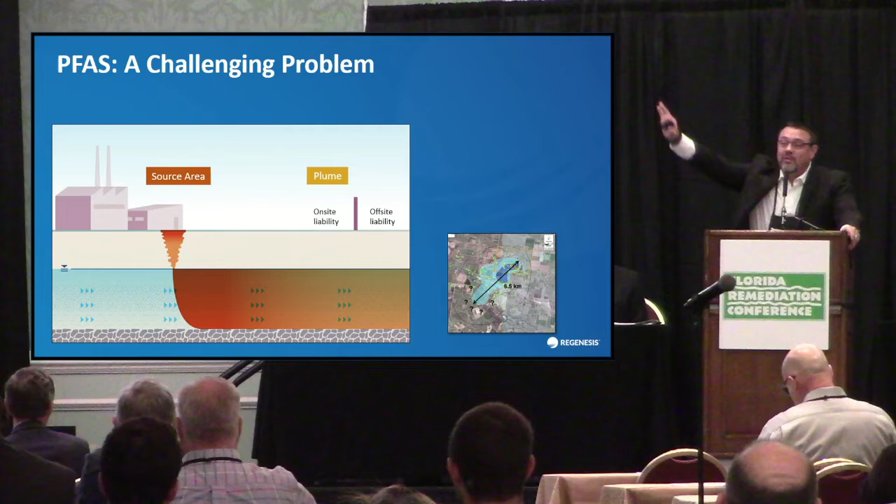First, before we talk about the solution, let's talk about the problem. As we're getting out there and starting to delineate these plumes, we're seeing where they're actually at, and we're finding out they're pretty big. A lot of the attenuation or degradation mechanisms that usually keep these things in check are not there, so they're ranging free across the remedial landscape. In that process, they're crossing lots of sensitive receptors: bodies of water, municipal wells, potable water wells, crossing boundaries. They're all over the place. So we've got on-site liabilities, off-site liabilities. We've got quite a problem on our hands, right below our feet.

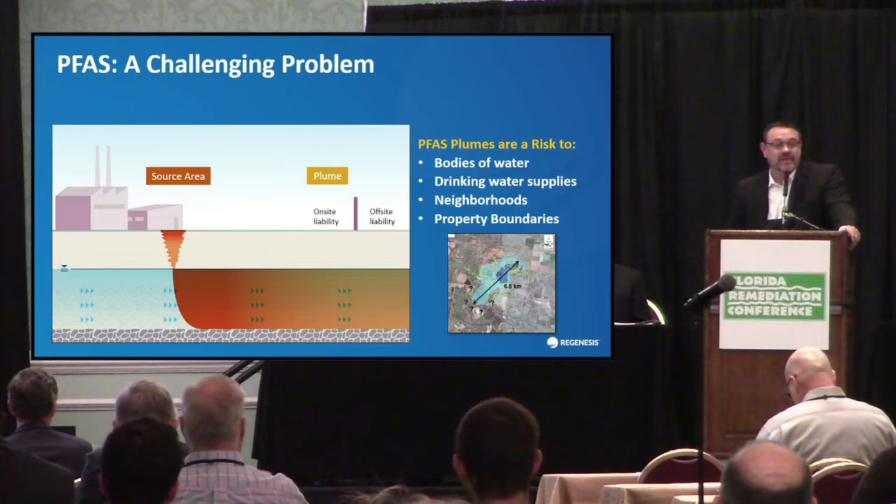So one of the approaches in the in situ world over the last several years is using colloidal activated carbon as a permeable reactive barrier, or PRB, to mitigate and slow down and retard these migrating plumes. Essentially this is an attenuation mechanism. If you look at the ITRC definition, they call it enhanced attenuation: the result of applying an enhancement that sustainably manipulates a natural attenuation process, leading to an increased reduction in mass flux of contaminants. So we're going to dig into what that means, into that mass flux question, and how this helps provide a mechanism for treatment.

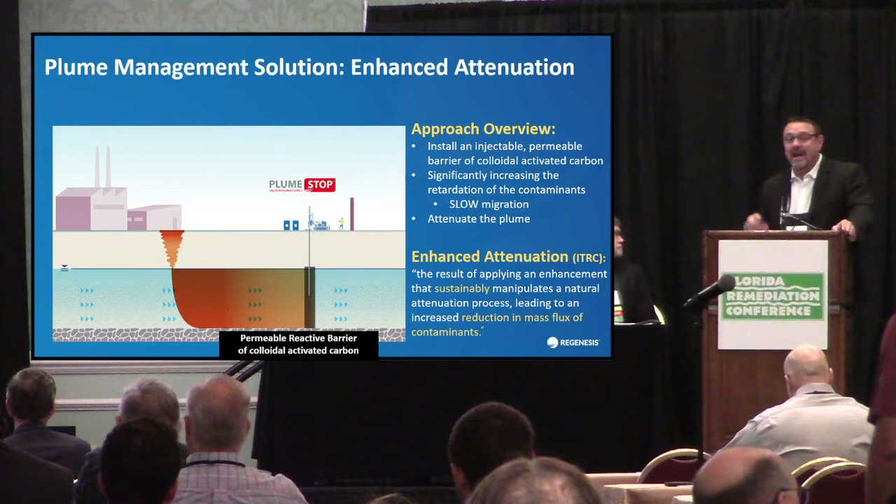In any scenario where you're using a permeable reactive barrier, whether it's carbon or otherwise, there's a lot of advantages. One, there's no infrastructure, no O&M — it's a passive management strategy versus an active one. It's not generating waste, and in the case of carbon, we're able to treat down to low part per trillion range levels. There's even rumors and rumblings of parts per quadrillion — that's a little mind-blowing, we'll see if the labs can keep up. But for now, we know we can get down to these PPT levels with carbon, and all of this translates to a very cost-effective approach for treatment.

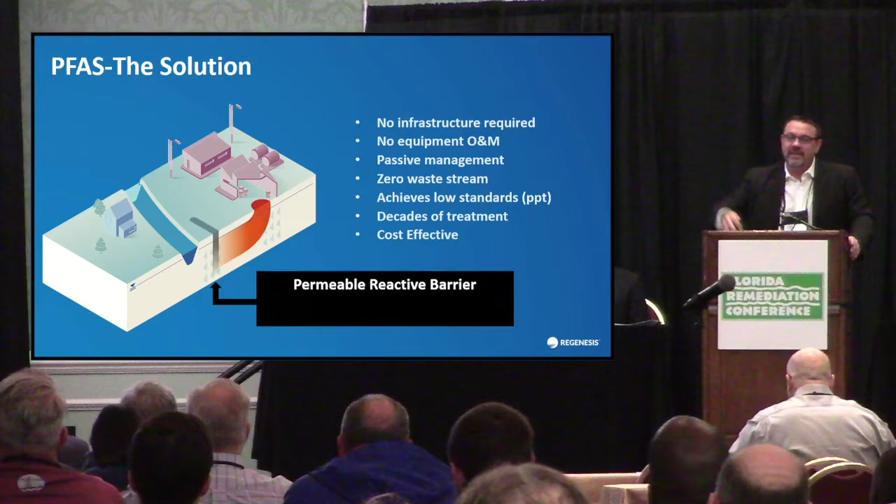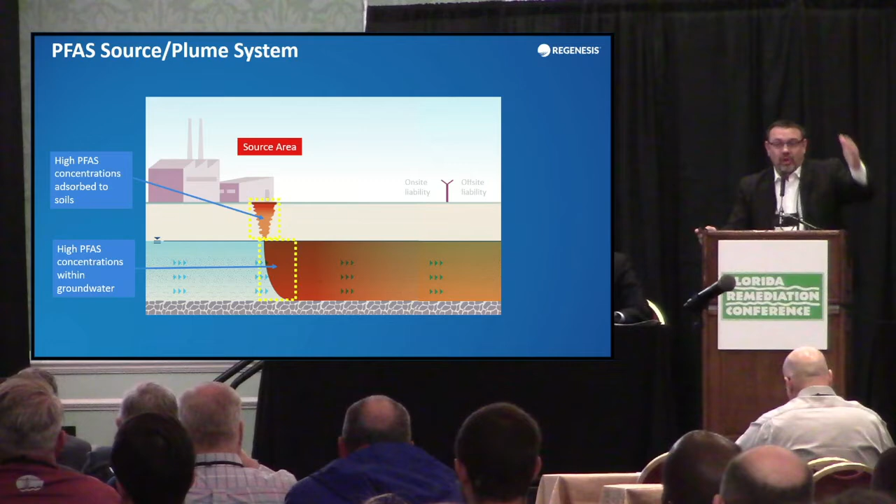So what we end up seeing is a few major areas where we identify different types of impacts. We've got high PFAS mass in the vadose zone, often a very thin zone, maybe from AFFF, a fire that was put out, or fire training for example. Below that, we see the capillary fringe where this stuff's hanging out. And then the distal, or further edge of these plumes, where we have lower concentrations down gradient. Each one of these looks a little different.

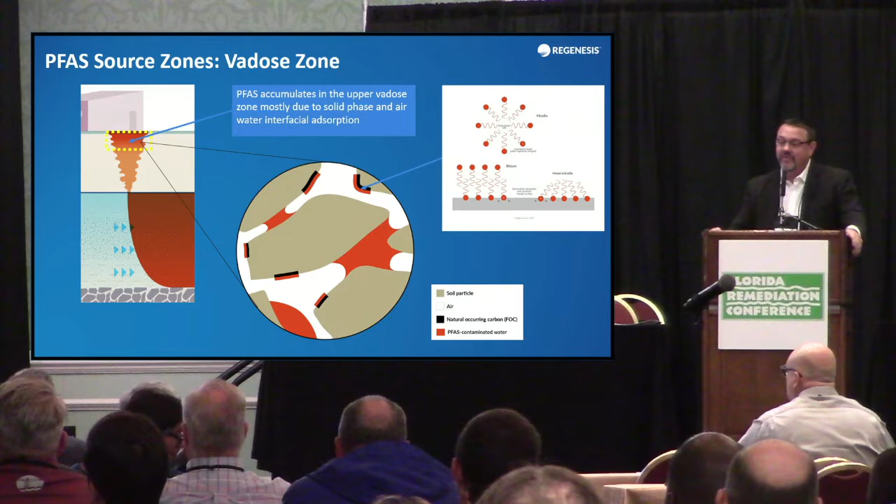If we look at the vadose zone, what we have is mass that's basically due to solid phase and air-water interfacial adsorption. They end up forming different structures, these micelles — hydrophobic and hydrophilic structures, hemimicelles, bilayers — all these things start to form in the vadose zone. When we go a little deeper, into the capillary fringe, it takes on a different feel. You have this same air-water interfacial adsorption going on, but the hydrophilic head sticks down into the water and the hydrophobic tail sticks up.

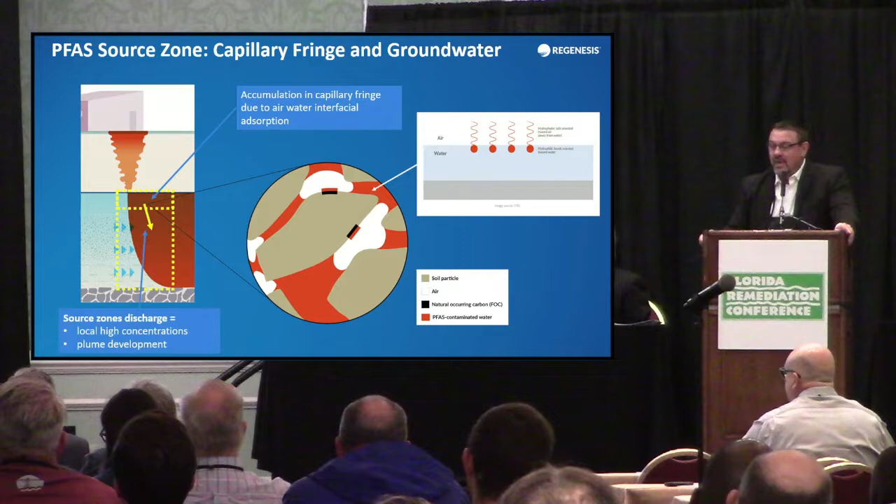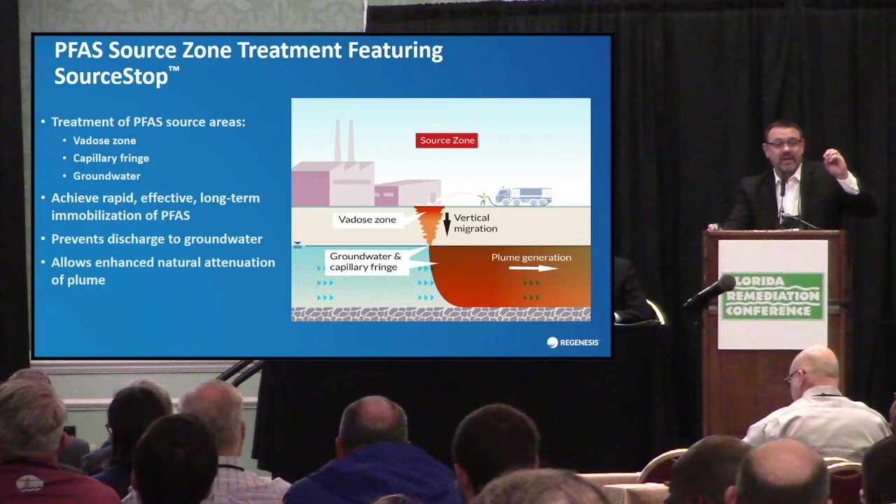So a little bit different look to the structure of that. And then, of course, down gradient, we have the dissolved phase mass that we're dealing with. So each one of these we want to approach, the vadose zone, the capillary fringe, the down gradient portions of these, to essentially get very rapid reduction in the leachability, the mobility, and the migration of these plumes.

And try to stop them, both at the source and down gradient. Essentially, if we're able to go to the source, kind of cut off the head, as we often do, and then go down gradient and stop further migration with these barriers, I'd dare say, we could have a forever solution. But let's talk about that before I get ahead of myself.

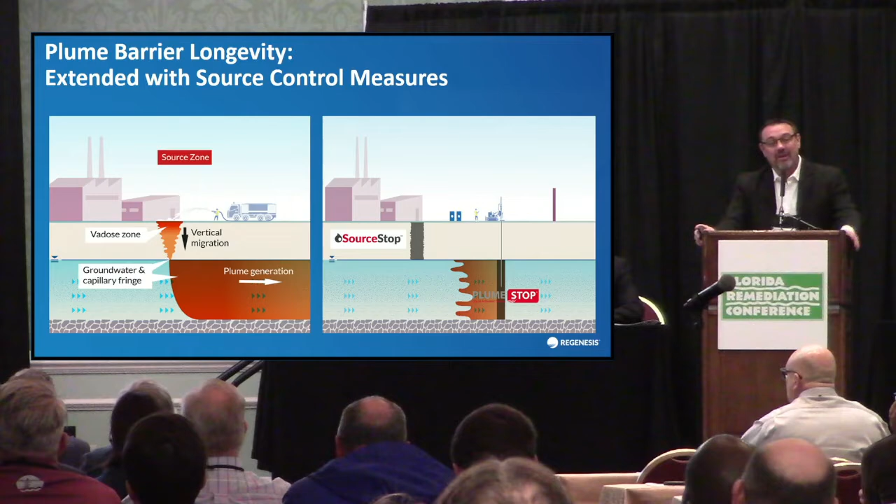All right, so that's the background of what we're dealing with, where it's at, what it looks like in the subsurface. So what we have is a lot of common questions I've seen, kind of 3 categories of those, and I really want to address those today as part of this discussion.

So the first one is, without contaminant destruction or degradation, how does this classify as remediation? How does it fit as remediation? The second is, how do we know about longevity? How do we know how long this is going to last? What affects the longevity and impacts that? And then finally, how can we really make sure we're getting a good barrier or source area treatment and getting carbon where we need to get it? So these are kind of the 3 major areas I've seen come up as we've encountered questions about this approach.

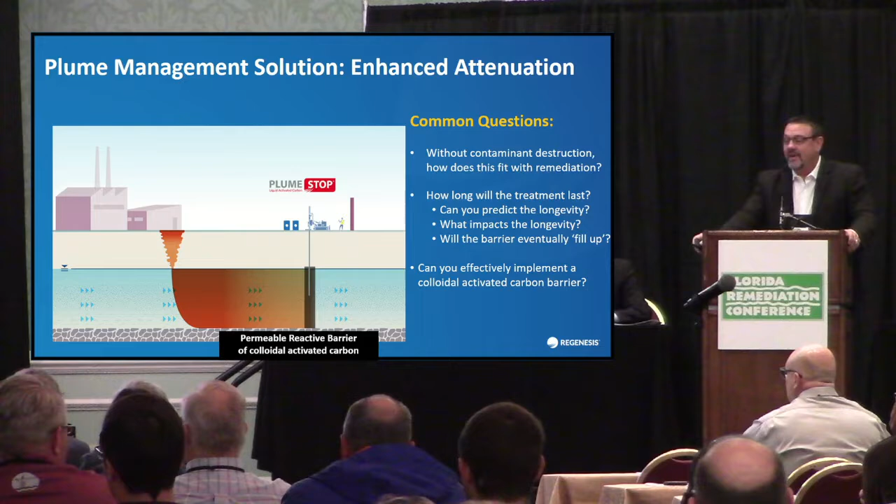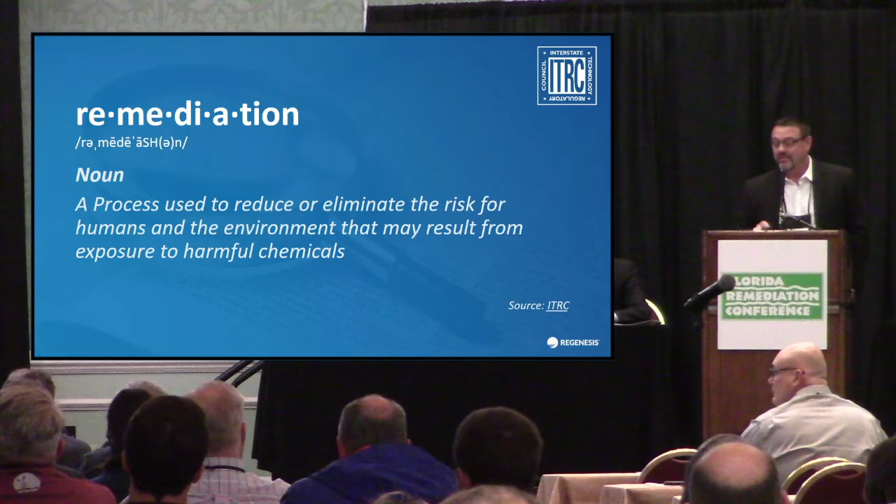So let's try to knock these out. First of all, it's the Florida Remediation Conference, right? So what is remediation? I think sometimes we forget, but ITRC, again, our friends say it's a process used to reduce or eliminate the risk for humans and the environment that may result from exposure to harmful chemicals. So reduce or eliminate risk and exposure.

And we know that risk is a product of the hazard times exposure. Now, one of the mechanisms we've been using for a long time to deal with this is attenuation, natural attenuation. And EPA defines that in 3 different ways. One is transformation of the contaminants to a less toxic form. So that might be like enhanced reductive dechlorination, ERD, where we take PCE, reduce it to ethene, innocuous ethene.

That's not what we're talking about here. Reduction in contaminant concentration—maybe we use chemical oxidation, we destroyed these compounds. Also not what we're talking about here. But the third one is reduction in contaminant mobility and bioavailability. So we're talking about that one.

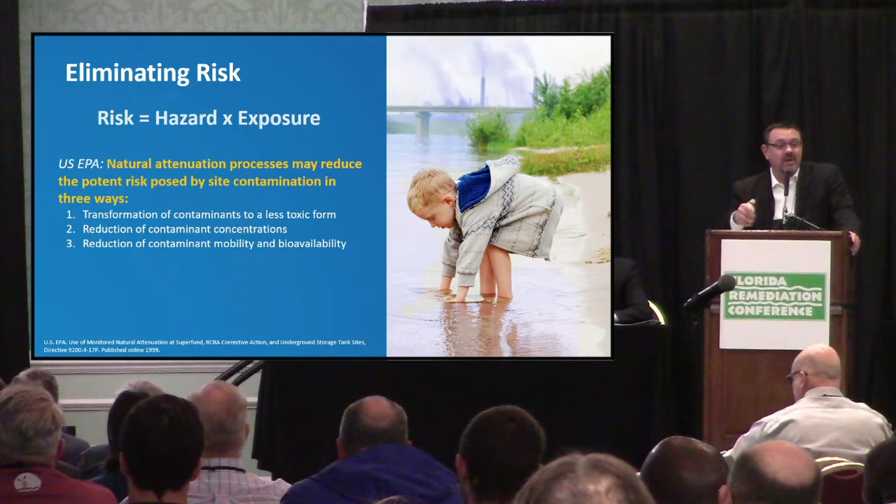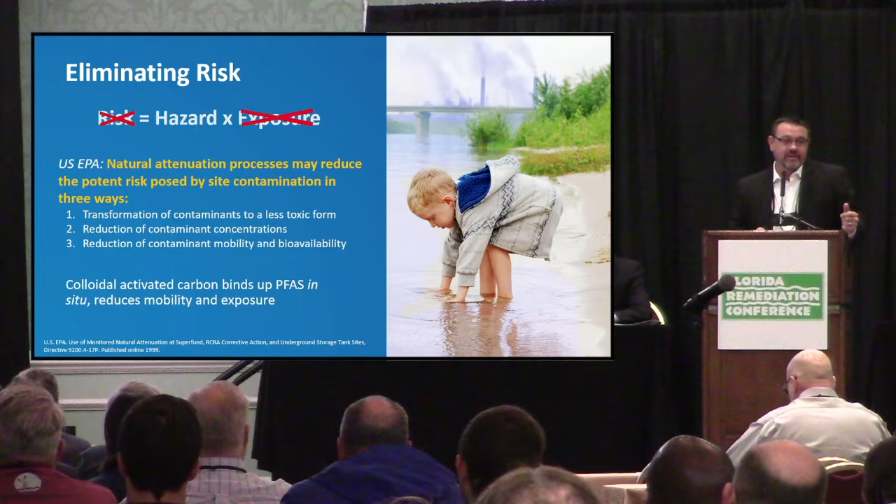So reduction in contaminant mobility. And basically by binding up the PFAS in this matrix of carbon, we're able to eliminate the exposure and therefore we eliminate risk. We've been doing this for quite some time for other compounds. We've been doing it for recalcitrant type organics. We do it for metals where we're not actually destroying them, but transforming them.

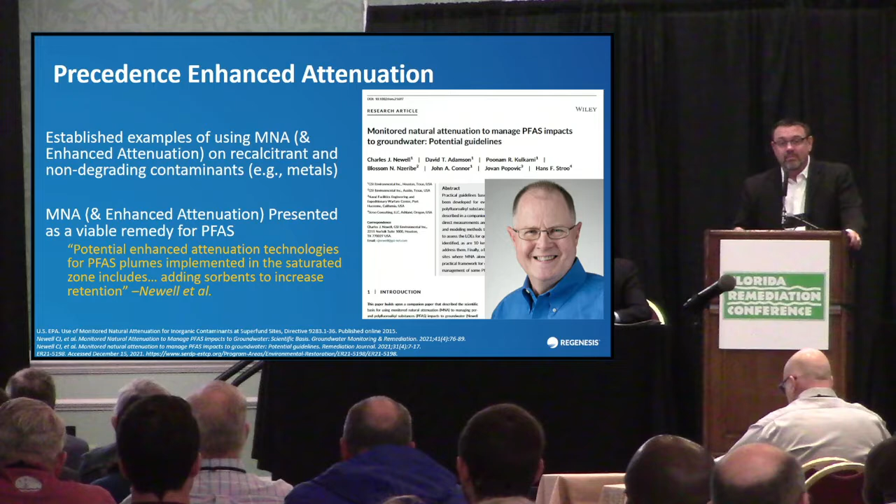So he recently said that the potential enhanced attenuation technologies for PFAS plumes implemented in the saturated zone includes adding sorbents to increase retention. So there's different types of sorbents—activated carbon, colloidal activated carbon is one example of those. So this is a path that is being promoted by folks that are in our industry that have been in it for a long time. So it's nothing new, but it's new because we're talking about PFAS and how we treat it.

So just to make sure we're on the same page about when I say colloidal activated carbon, what am I talking about? There are a couple different forms, a couple different technologies, but essentially it's 1 to 2 micron scale carbon. To put that in perspective, that's about the size of a red blood cell, the size of bacteria—we're pretty small. So it's not powdered activated carbon or granular activated carbon. This is really small stuff in a suspended colloidal liquid form.

And what that allows us to do is get high volume, wide area distribution and inject at low pressures. And so we can get this stuff spread out in a way that we basically convert the subsurface into a carbon filter, kind of like a Brita filter in the subsurface.

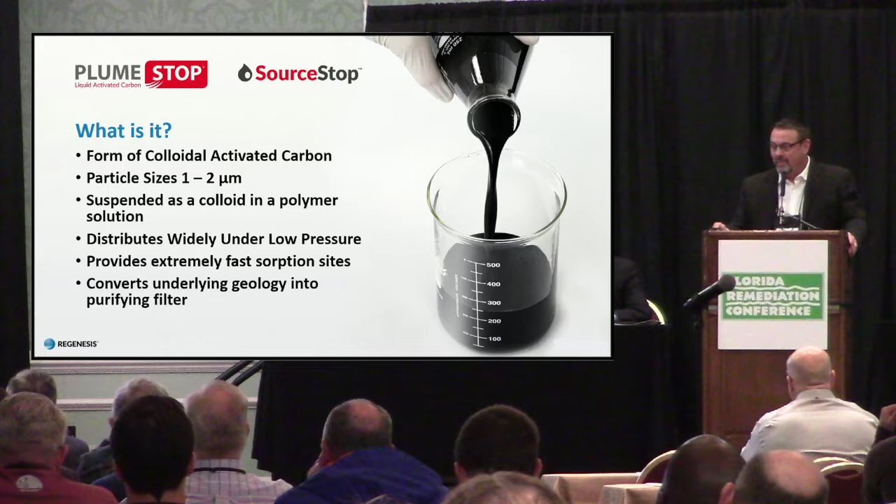So I always go back to these pictures. I've never gotten tired of them. It's been 7 years this week, actually, that I've been using these photos.

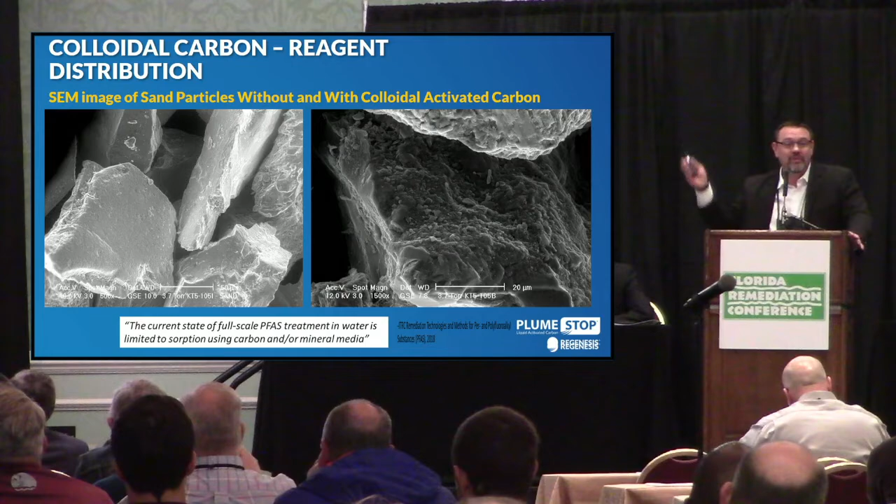But the pre- and post-injection scanning electron microscope images tell the picture. Essentially, we are painting, I like to say, the surface of the aquifer matrix with this carbon. That becomes a permanent part of the aquifer matrix. So, again, conversion to a carbon filter without changing the advective transport or the hydraulics of that zone. It's not blocking up the pore throat diameters, still wide open for contaminant transport and then sorption.

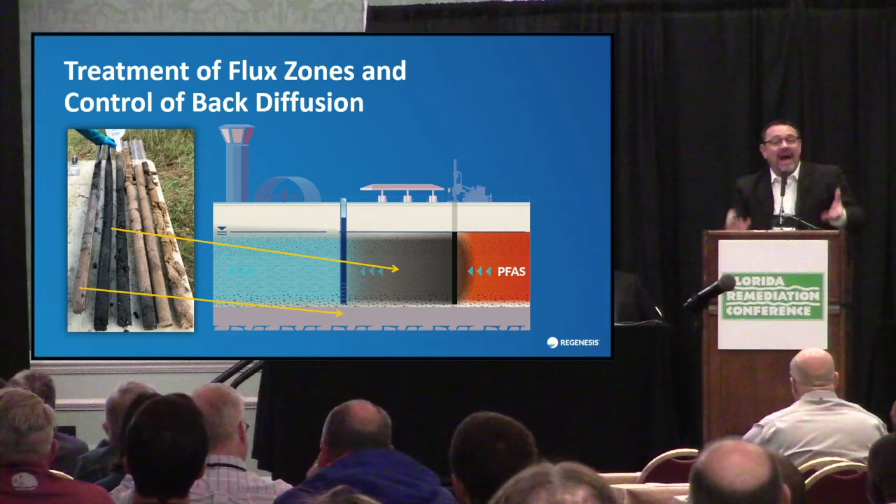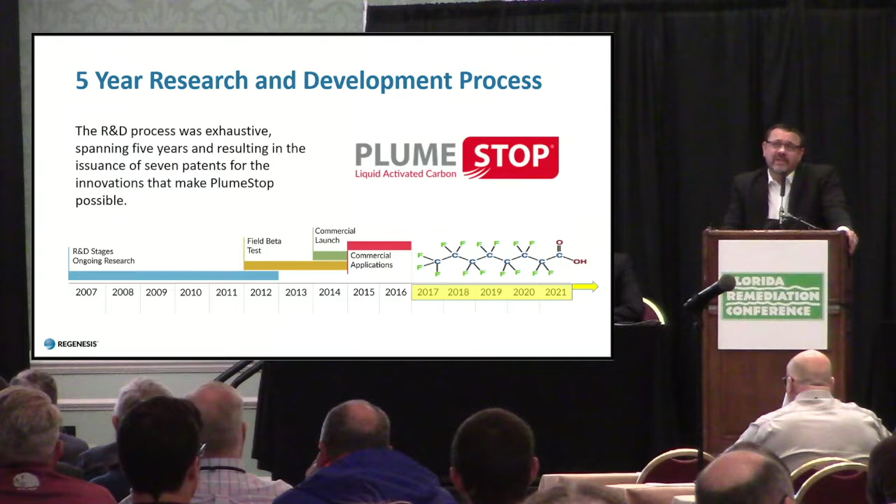So I wouldn't say colloidal carbon's a new technology by any means. It's been a decade plus in maturity, but the use of it in the PFAS world has been going on for about the last 6 years for treatment. And I've seen, I think, over 26 sites now globally that we've treated with this approach.

And there's a lot of folks out there, third-party research that's going on with academia. You guys might have heard Dr. Paul Hatzinger with APTIM. I know there's a lot of APTIM folks here today. He's one also doing some third-party research, EPA-funded work. So a lot of folks exploring these concepts and the use of this outside of REGENESIS.

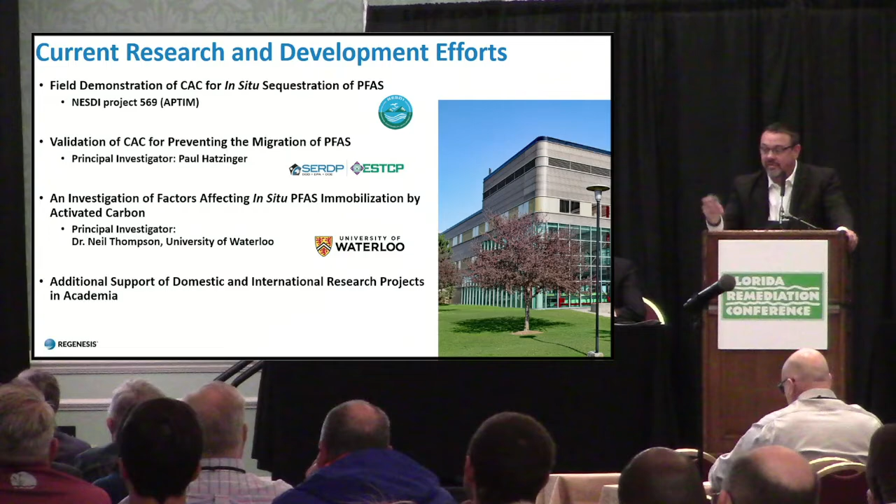So that was all about how does this fit remediation, right? The use of carbon for treatment. So now let's shift gears to, well, how do we know how long we can treat? What about treatment longevity?

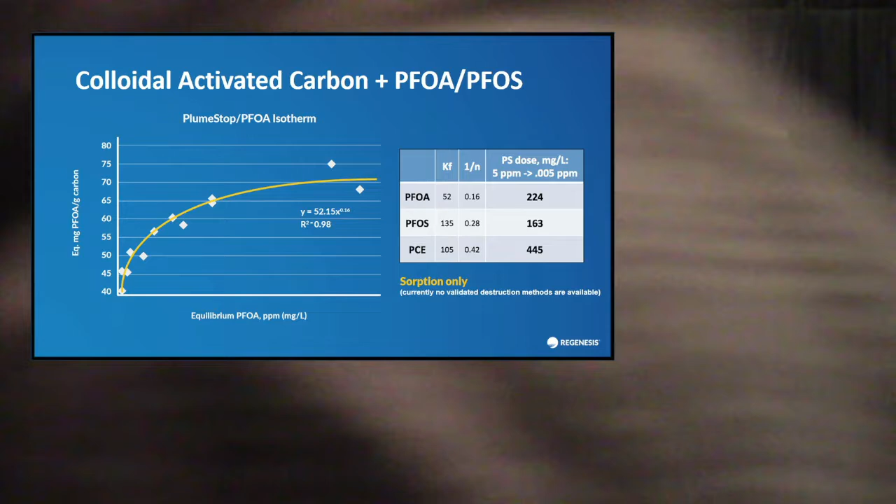First of all, we have to go back to what we call the isotherm, or more specifically, the Freundlich isotherm. And what this is the equilibrium concentration, the dissolve phase to the sorb phase for a particular mass of carbon at a particular temperature, isotherm.

And what's unique about this is often technologies are more efficient at the higher mass concentrations, right? That's where they do the most damage. With carbon, you can see this curve dropping down, and it's got a high efficiency because of that at treating to low levels. So this is essentially why we can treat to that PPT range.

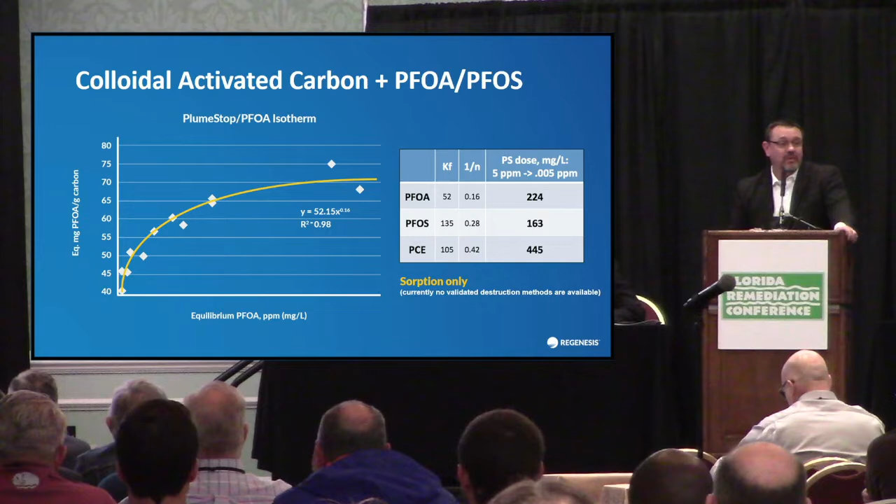And you can see a couple candidates here, PFOA and PFOS, the two celebrities in the PFAS world, and comparing that to PCE. And I don't think anybody would argue that PCE is not a good candidate for carbon sorption. So you can see that compared to the same reduction for those three compounds, we need about 2 to 3 times less carbon to achieve the same results with PFOA and PFOS as we would with PCE. So those guys love to be sorbed.

And then in terms of modeling, Dr. Jeremy Birnstingl out of Bath, England, has developed a software called Plume Force. I always have to say it that way. It sounds kind of, you like that? That's like Plume Force, like everybody's paying attention now. So what this is basically is a fate and transport model, long-term predictive model for figuring out, can we really tell in space and time what's going on at a particular point?

So you may have heard this before. All models are wrong, but some are useful. So what we've been doing is doing a lot of sensitivity analysis, comparing results to what we had predicted to make sure this model is in check, and it has been.

And what we're looking at a lot of different factors, competitive sorption amongst the compounds. We're looking at compound-specific isotherms that we just talked about. So each compound has its own isotherm. And not just its own isotherm with carbon, but the type of carbon. So colloidal activated carbon has a better isotherm than, say, granular activated carbon. Okay, so that's something to tuck away in the back of your mind.

And then we can look at degradation. A lot of these plumes are commingled, maybe with BTEX or chlorinated solvents. We can still degrade those compounds when they're sorbed to the carbon and open up new sorption sites to prolong the longevity of the carbon. We do that for a lot of different classes of compounds.

So there's a lot of parameters we throw into this. Some of those are fixed, based on the geology, the hydrogeology, but then we can start manipulating some things, like the dimensions and the dosing, and see what the impact of the longevity is on the barrier.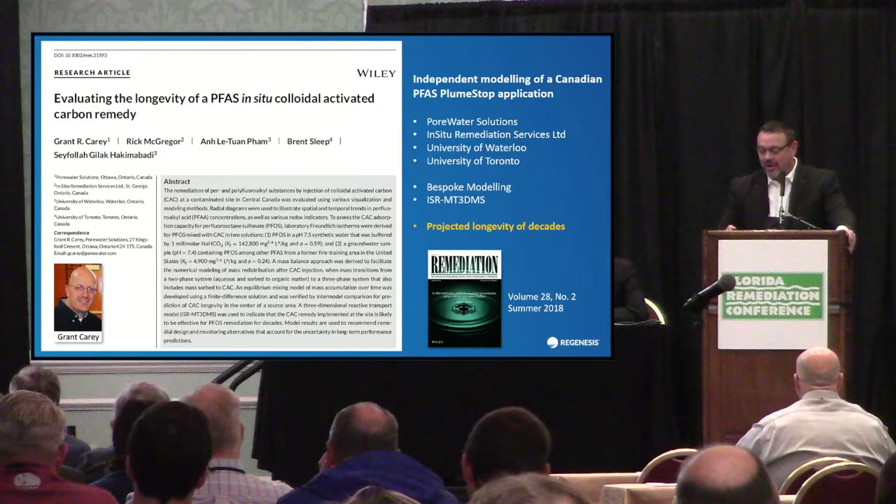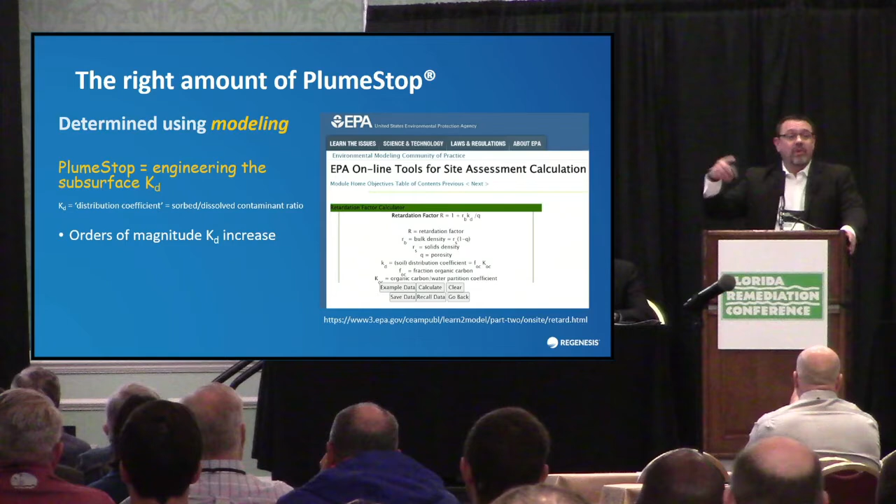So part of what the longevity boils down to is retardation factors. I'm going to dig into this a little bit. First of all, putting carbon into the ground allows us to engineer the retardation factor. We're changing the distribution coefficient, the KD value, which is the ratio of the sorbed to dissolved phase mass. We can change that by orders of magnitude by injecting carbon into the subsurface, and that KD value is part of the calculation for the retardation factor.

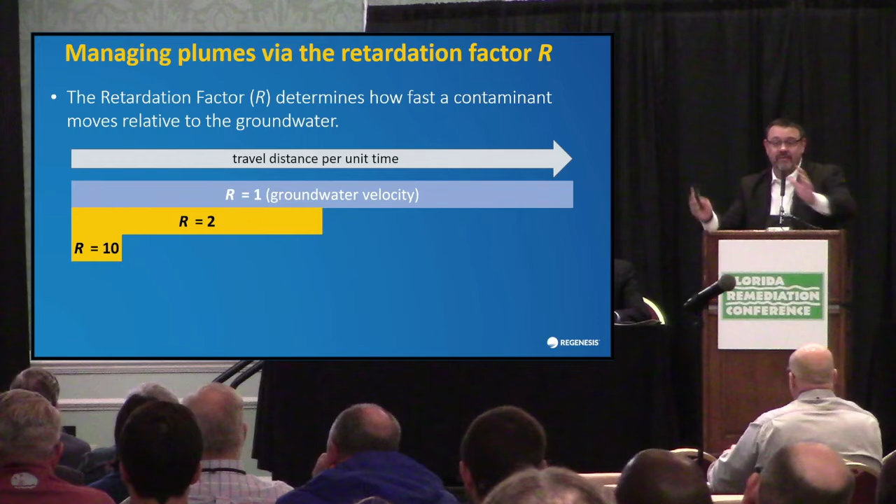So when I say retardation factor, if that's an unfamiliar term, let me remind you it's the contaminant velocity relative to groundwater. An R value of 1 means they're moving at the same speed, basically the molecules. An R value of 2 means the contaminant is moving at half the velocity of groundwater, et cetera.

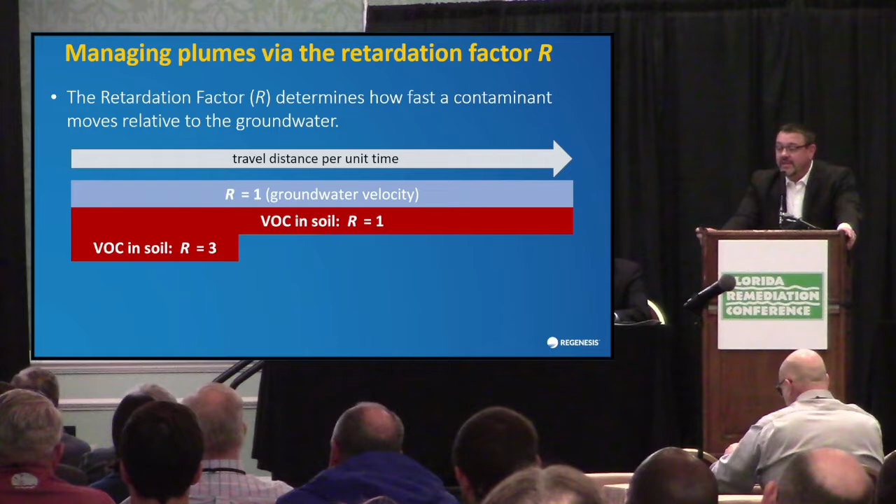Typically what we see are R values of maybe 1 to 3 for VOC situations. But when we start putting carbon in the ground, for example at a standard dosing at about 100 ppb TCE plume, we change that value to 600, a couple orders of magnitude difference. Think of that as a slowing down of the molecule moving through the barrier, so we've slowed it down by a factor of 600.

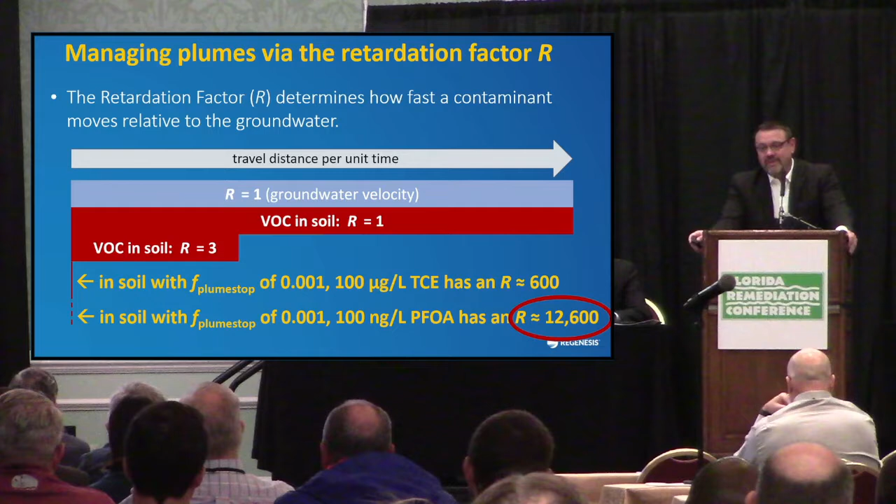If we think about PFOA at like 100 ppt concentration, which would be typical at the distal edge of a plume, that value goes up to over 12,000. What's that mean? It means this table. It means for these compounds, going from low molecular weight to high molecular weight, there's a red line that says these guys are regulated somewhere by some states currently. You can see that for PFBS, at a standard dosing, at a common concentration, we're talking about a century of essentially immobilization in that barrier. That only gets better with increasing molecular weight, up to over 1,000 years at a standard dosing.

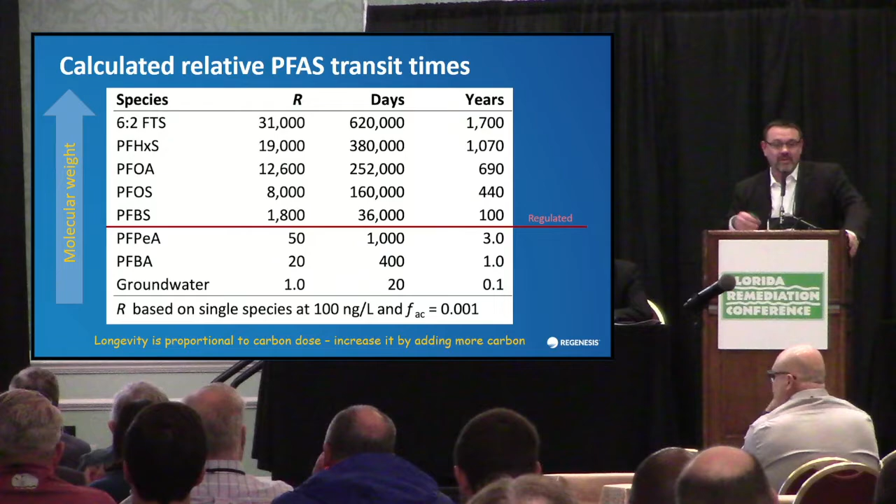And we can change the dosing and get it even better. But just to give you a picture, when I say longevity, we're not talking about a year or two. We're talking about tens of years, hundreds of years of immobilization and retardation of the plumes with one application.

So that's the longevity question. And I got one more here I wanted to get into: how do we know we're getting carbon where we need it? How do we know it's being put in the ground as designed? So this is a bunch of field techniques that really apply to any sort of in situ work. What I'm going to say here doesn't just apply to colloidal activated carbon.

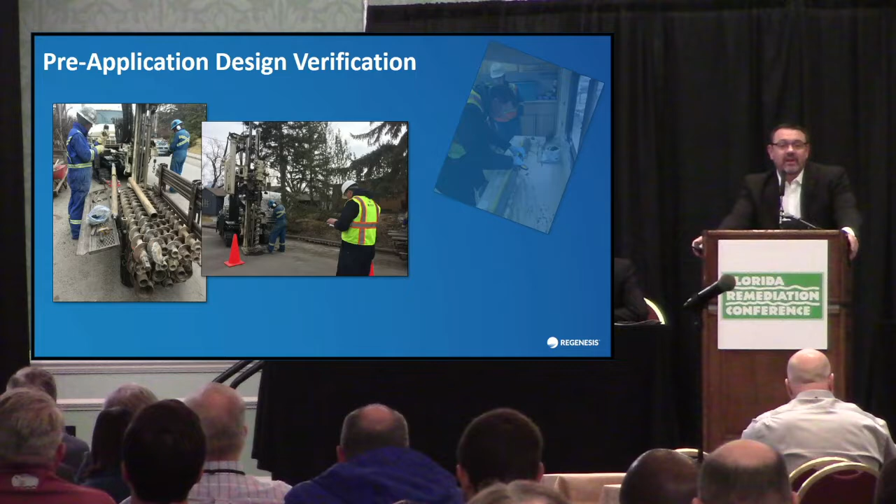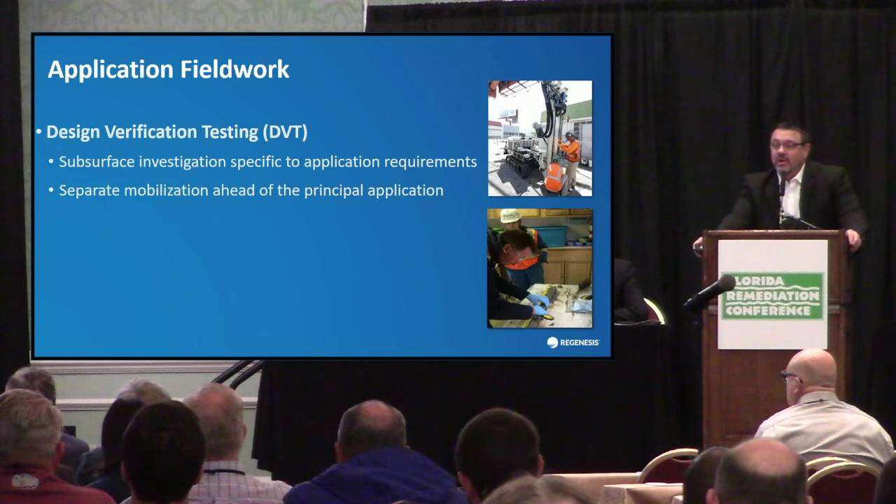So the first thing is a pre-application step, something that we do prior to going full scale. There's a mobilization ahead of time; we call it design verification testing, DVT. When you do site assessment, you're delineating the plume and figuring out risk, but that information doesn't necessarily give us what we need for remedial design. So there's a whole other step where we might want to dig in for the parameters we might not get from the site assessment that we need for remedial design in situ, like more detailed stratigraphy, high resolution characterization data, and flux measurements.

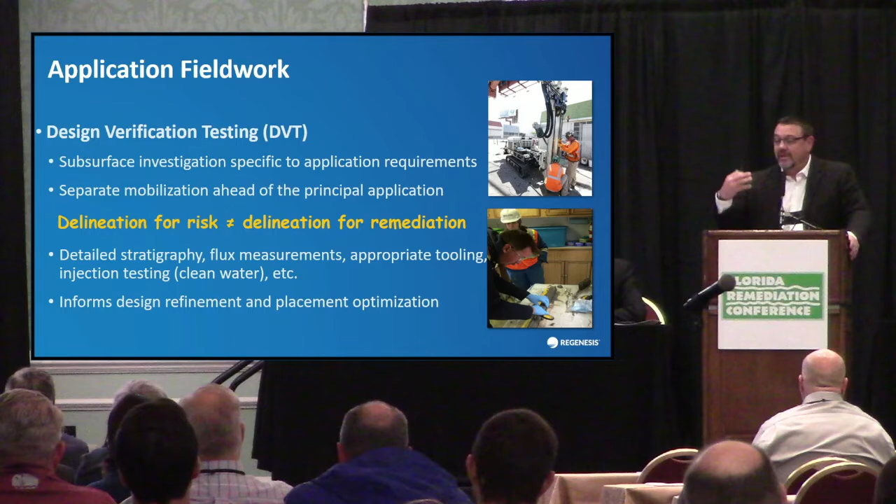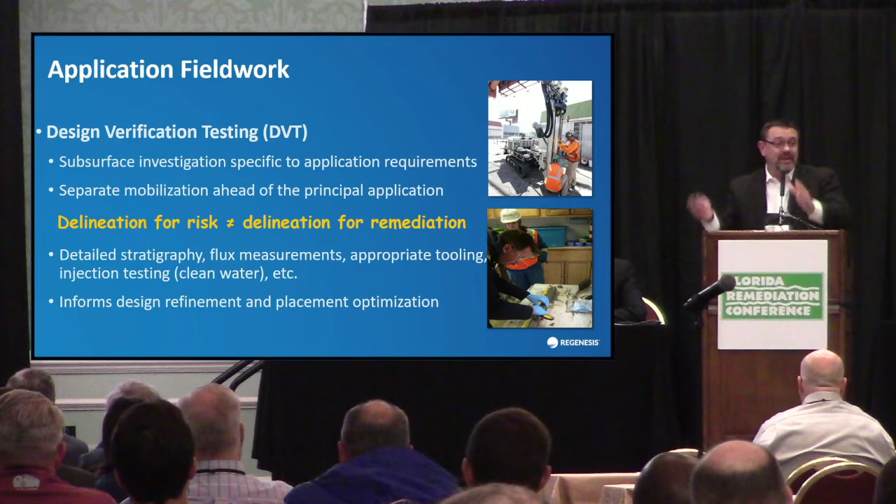I'm going to talk about that a little bit, and then maybe looking at the volumetric acceptance rate of the aquifer. How much volume can we get in there? What are the pressures and the ROIs we might expect? All of this information we then take back to the original design and massage it, calibrate it, and optimize it before we even get to full scale. So it's an important step.

And I'll tell you why here. So where we've looked at these sites and identified what we like to call technical blind spots, kind of data gaps, about 80% of the sites generally have something like that in some major category or multiple categories.

And the importance of that is if we miss one of those, we risk non-performance or underperformance. About 60% of the time, about 2/3 of the time, we're going back to the design and changing some things. Often it's a cost-neutral change because we're maybe changing the dosing or moving some stuff around or changing the treatment interval based on what we learn during design verification testing. So there's an avoidance cost here by not having underperformance or non-performance at a site. A really important step.

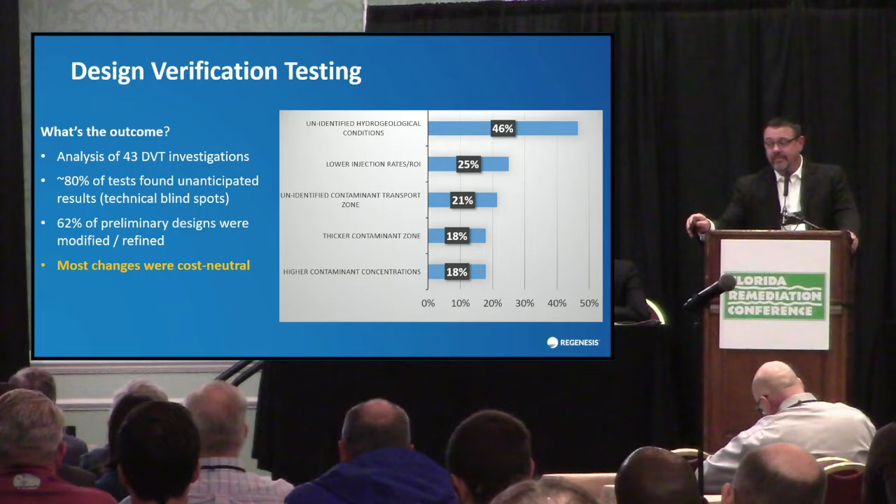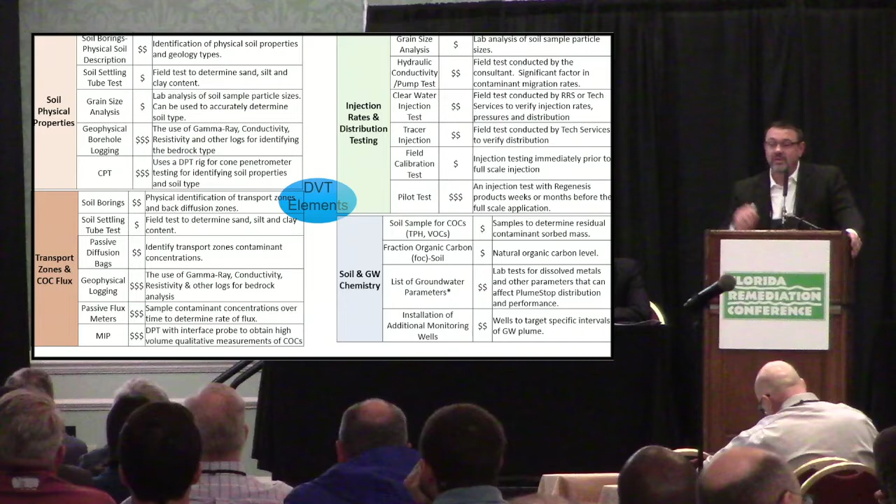But what I do want you to focus on, the point of this is there's a lot of different techniques depending on what your data gaps are, right? And depending on what your budget is and what kind of resolution you need. There's all these different things in the smorgasbord of DVT that you can choose, but the 4 boxes represent the important categories: soil physical properties, transport zones and contaminant flux, injection rates and distribution testing, and then soil and groundwater geochemistry. So those are the boxes we want to be checking for in situ design, carbon or otherwise.

So one of the things I do want to focus on is this device called a passive flux meter, PFM. In this case, we use FluxTracer. What this is—we talked about mass flux and how that's important for enhanced attenuation and figuring this stuff out. Basically, what this allows us to do is vertically delineate the Darcy velocity as well as the contaminant distribution in the zone where we want to treat.

Often we have a site geology and someone says, well, the conductivity is this because this is the site soil, right? That's a pretty broad assumption. Or maybe you've done pump testing, aquifer pump testing, slug testing, and you got some values for conductivities. That's good too, but it's really more aligned with pump and treat approaches where you have recovery wells and such.

When we do sorption, we want to use a sorption-based test. So this is a carbon-based type of device. And what we get to do is get real surgical, real strategic with our design by taking this information at high resolution, generally on 1 to 2 foot intervals. Basically, these things are deployed for 2 to 3 weeks in an existing monitoring well, then pulled out. There are alcohols that wash out, and based on the time and what's left, you can back-calculate the Darcy velocity and then take samples for the distribution of the contaminants on that carbon core.

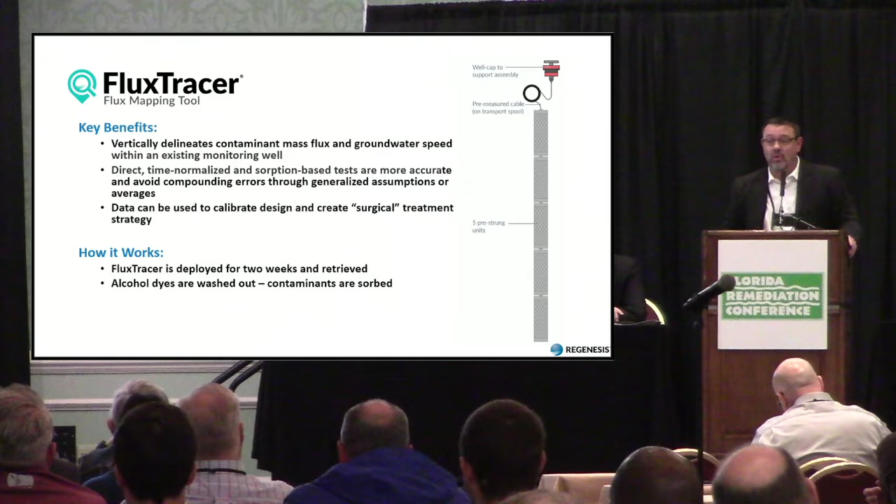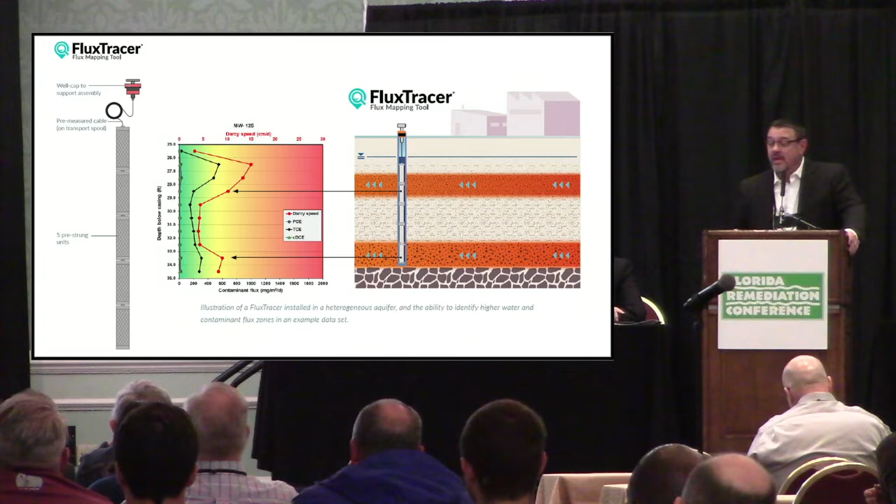So that's all the stuff we might do before we even get out for full scale, right? That's getting it right before we get to the big event. So we have another step called placement validation. This is essentially happening in the field, on the fly. I call it dynamic remediation—you may have heard that term—where basically we're looking at things while it's happening to verify what's in the design matches what's happening in the field.

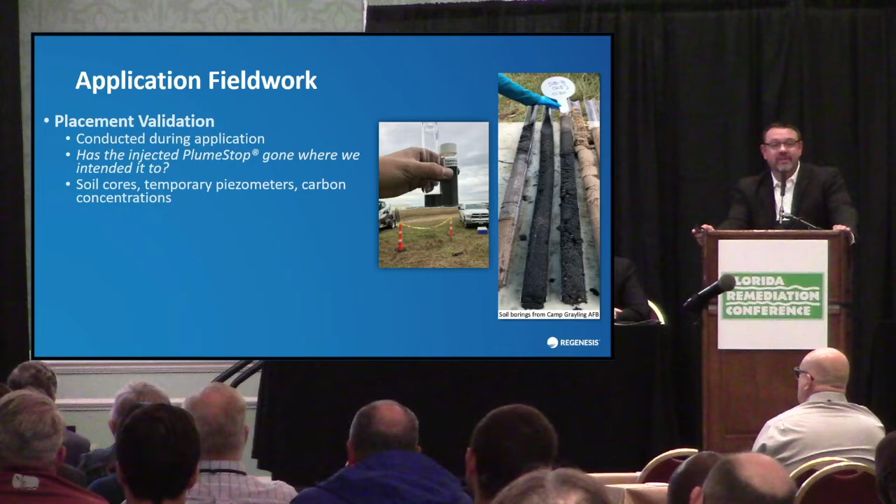So we can do a lot of different things. Often we'll take soil cores—carbon's a great tracer, so we can look at cores to see how it's distributed. And then we can look at colorimetric test kits, where if we have influence in the well, which we want to see—that means we're getting good radius of influence—we can take that colorimetric test kit and say, well, here's the dosing that we're getting.

Does it match what we designed for? We can make adjustments, put in piezometers, and see if we're getting the radius of influence and distribution that we anticipated in the design. If we are or we aren't, we can make adjustments right there, call up the design team, talk to the field team, and make things what they're supposed to be based on the design. So it doesn't stop once it's on paper in the design.

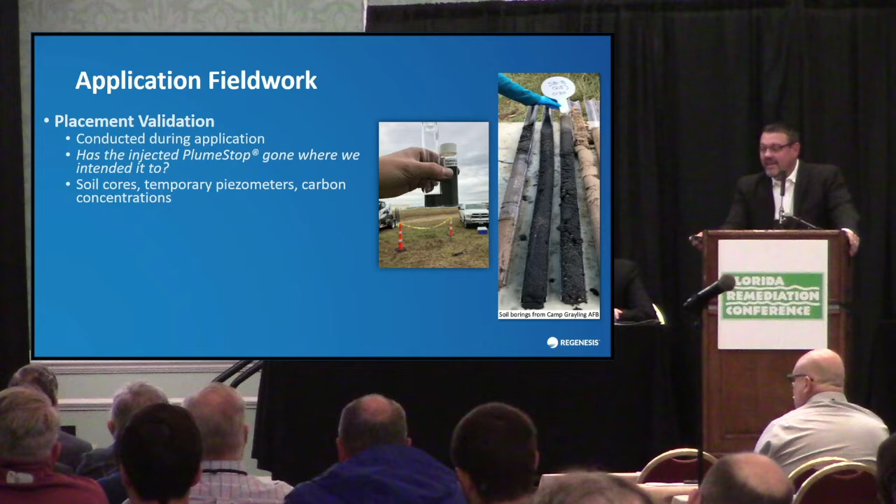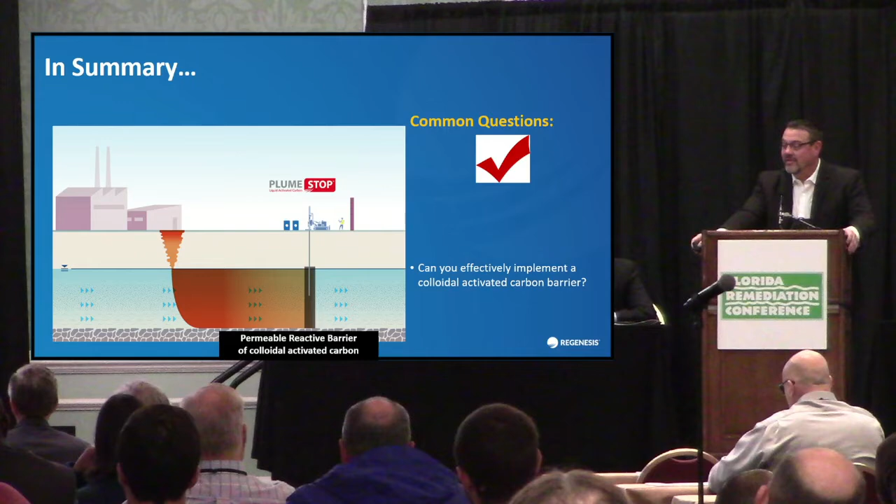So we had 3 big questions today. How does PFAS and colloidal carbon fit the definition of remediation? I think we got that one covered. The second one is, how long does this stuff last? How do we know, how do we model it? We got that one covered. And then finally, can we effectively apply and implement a carbon barrier in the subsurface to truly convert it to a carbon filter? Check. I think we got all 3.

Those are 3 questions I hear a lot, so I'm here to listen to any questions you guys might have. We have a little bit of time left, it looks like. It's a little early. I've had a little bit of coffee, so I think I can handle 1 or 2 questions maybe. But thank you.

If there are a couple of questions for Chad or comments. Yes, ma'am, I'm sorry, go ahead.